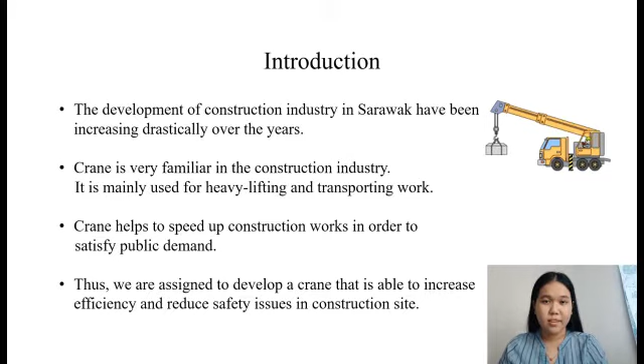We have figured out some problems regarding the project before proceeding to our crane design. Firstly, how to ensure the crane's stability, mobility, and long-term use. Secondly, existing site conditions or environmental factors may affect the crane's movement on site, such as uneven terrain, other moving lifting equipment, supply vehicles, and diggers.

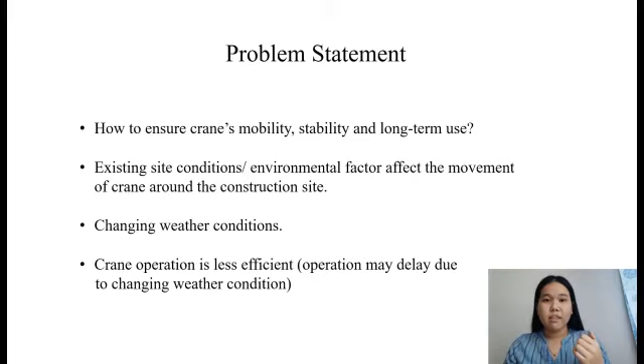Thirdly, changing weather conditions such as strong wind may cause the crane to topple, and heavy rain may reduce the operator's visibility. It may also cause the crane to be unstable because the platform could become muddy during heavy rain. Lastly, crane operation will be less efficient where operations may be delayed due to weather conditions.

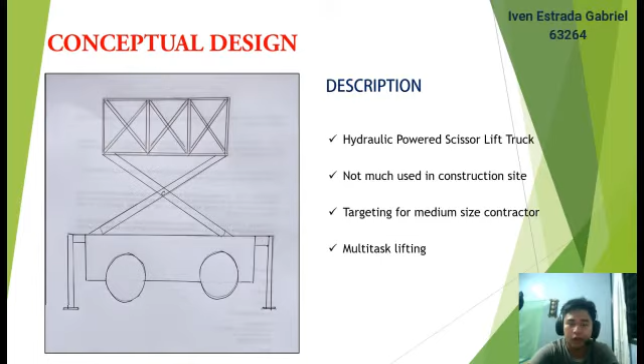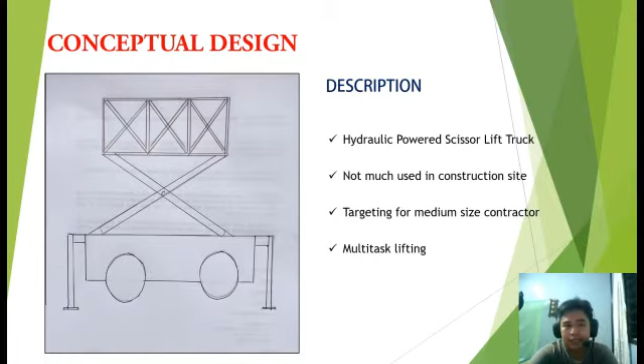For our conceptual design, our group decided to choose a hydraulic powered scissor lift truck, as we believe this kind of concept is rarely used on construction sites. Our group decided to target only medium-sized contractors, usually involved in housing construction, typically two-story housing. This concept is also designed to do multitask lifting, as long as the load does not exceed the maximum capacity of the truck.

This is basically our model. The dimension is 4.1 meters length by 2 meters wide. The weight of our truck is approximately 900 kilograms, and the maximum capacity or maximum load is up to 1.7 tons, which is basically the standard size of a single brick pallet. The maximum height this truck can lift is approximately 6 meters, around a 2-story building height, since we are only targeting medium-sized construction.

Our truck also operates via controller with a single operator. We also installed hitches in front and at the rear for transportation that can be connected to any trailer via a hitch.

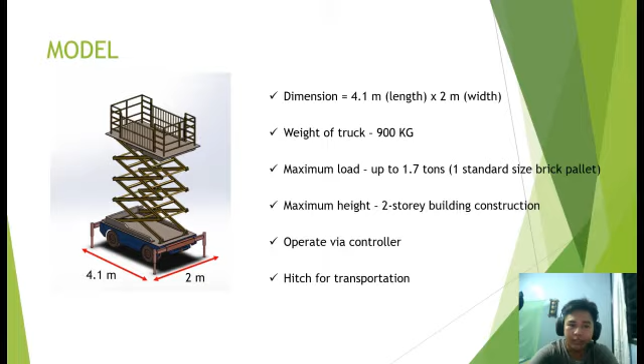Material selection plays an important role when designing a machine. It affects many factors including durability, reliability, strength, and resistance. A good selection of material can increase the lifetime of a machine. Before selecting a material, it is important to evaluate forces acting on each component to get the mechanical properties, and then select a suitable material for each component.

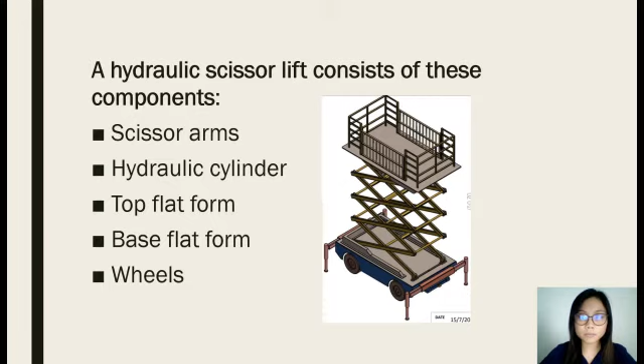Material selection of the hydraulic scissor lift: it consists of 5 components, which are the scissor arm, hydraulic cylinder, top platform, base platform, and wheels. For the scissor arm, these components are subjected to buckling load and bending load, which tend to break or cause bending of the component. Therefore, the recommended material is stainless steel.

Moving on to the hydraulic cylinder, this component is subjected to direct compressive force and internal compressive force, which imposes a bending stress that may cause buckling of the component and generate circumferential and longitudinal stress around the wall thickness. Thus, the recommended material is mild steel.

Next, the top platform: this component is subjected to the weight of the workman and his equipment, hence strength is required. The frame of the platform is mild steel and the base is wood. Lastly, the base is subjected to the weight of the top platform and scissor arm, and is responsible for the stability of the whole assembly. Therefore, mild steel is used.

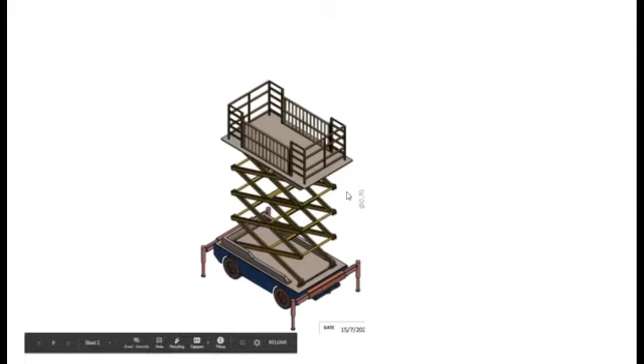As you can see, our project is a scissor lift truck. Our end actuators are the tires, the 4 tires, and the scissor frame. So all we need, by calculating the power, for example if we want to calculate the power needed for the tires to move, first of all we can...

Calculate the horizontal force dragged by the vehicle while moving forward, then calculate by the shaft inside here, and then by that we can find the power source.

For the scissor frame, we can calculate its power while the vehicle is static and the scissor lift is moving upwards, pointing upwards, and by calculating that.

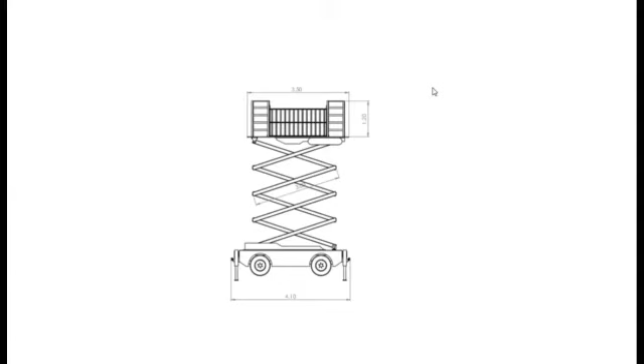I will show some of the calculations for our design. This is our FBD, whereby for our design specification, our maximum loading is 1,700 kilograms, the weight of the vehicle is 1,500 kilograms, and the height of our scissor lift is around 9 meters.

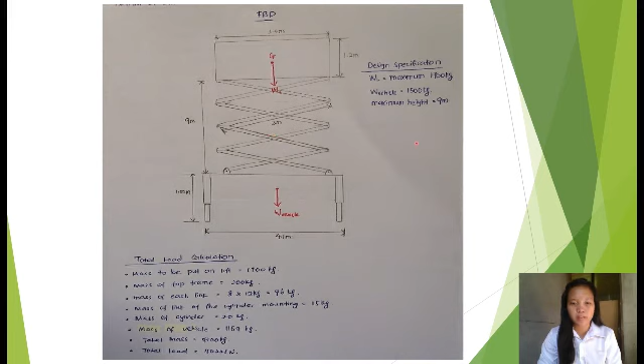First, we design the link, calculating the design of the link in order to get the force at the end of the link and also the force at the middle of the link, which is shown here.

Then we calculate the design of the cylinder in order to get the value of the diameter of the rod and also the diameter of the cylinder.

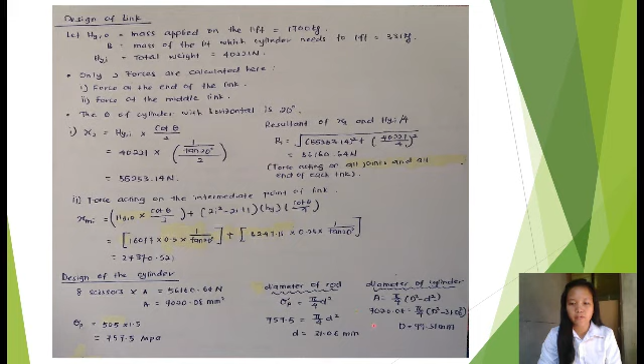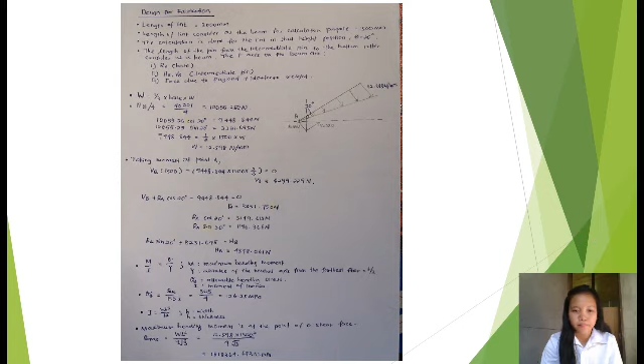Next, we do the calculation for the fabrication design, where our target is to get the maximum bending moment of our design, and also the width and thickness of the scissor lift. By substituting all the values into the formula, we get the values of b and h.

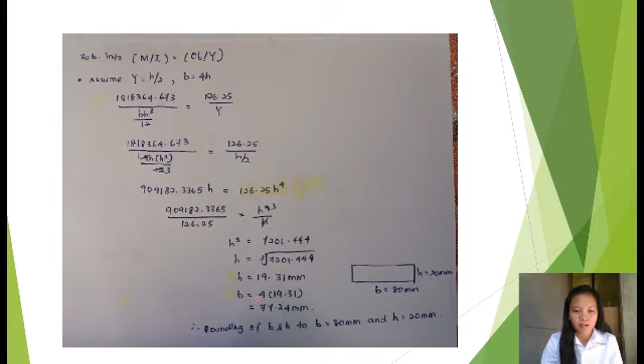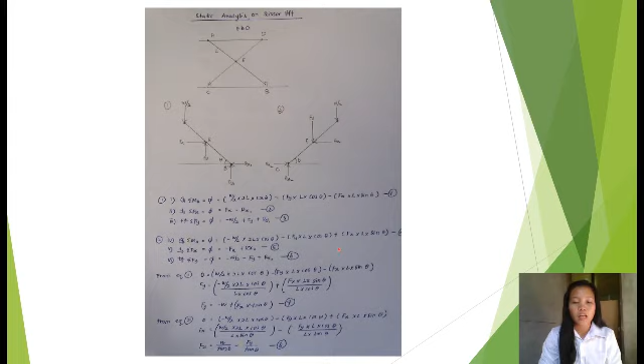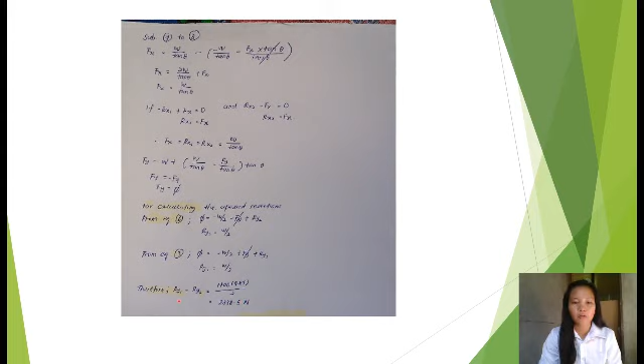This is the static analysis of the scissor lift, which needs 6 equations with 6 variables in order for us to solve and get the values for ry1 and ry2. After calculating, we get the values for ry1 and ry2, which are the same value. Thank you.